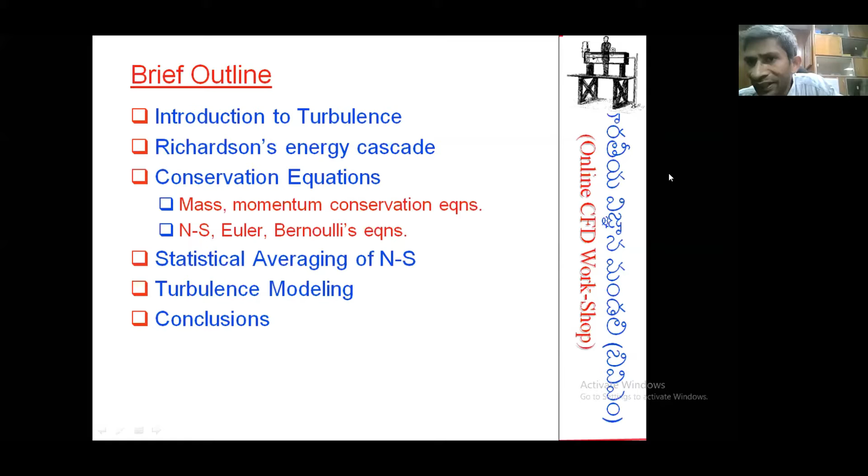Turbulence aids that. If you're thinking of flying machines in air or submarines in water, you need to understand aerodynamics and hydrodynamics. Turbulence completely controls both, depending on the situation. Think in terms of drag reduction of vehicles, for example Formula 1 race cars. You don't just want to reduce drag alone, but also make sure lift-to-drag ratios are within favorable limits.

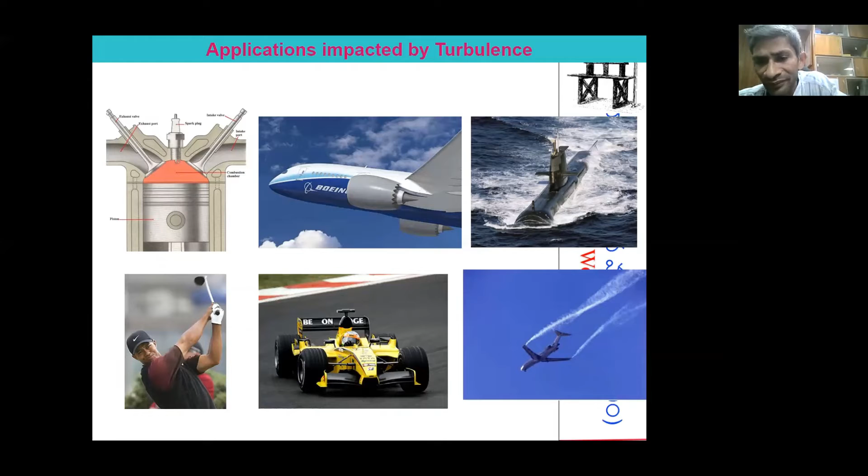Some common characteristics of turbulence that most of you are familiar with: turbulence is random, chaotic. These are essentially features of turbulence. Small scale random vorticity is generated, and it's a phenomenon of high Reynolds numbers. It highly dissipates energy, it's a continuum phenomenon, and of course it's three-dimensional.

One of the most important things to look at is: how do I define turbulence? This will be one of the serious questions. If somebody asks how to define turbulence, it's extremely important that we appreciate how turbulence can be defined. Maybe some participants can respond with how they think turbulence can be defined.

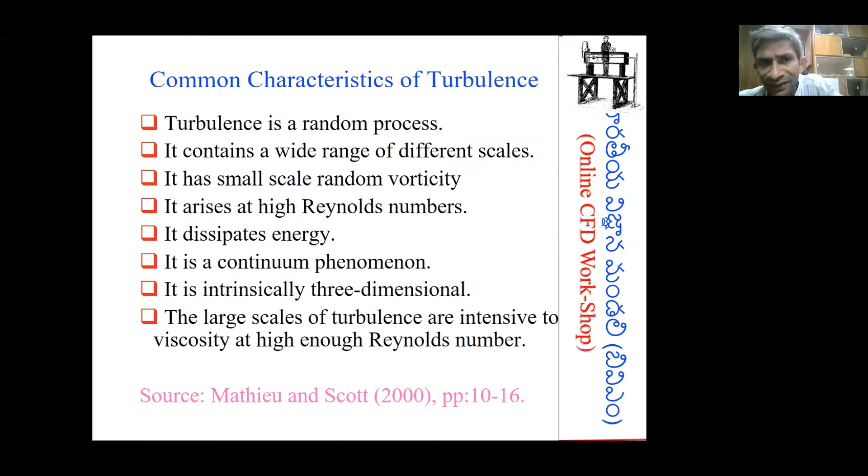One of the earliest experiments, of course, I grew up using Reynolds pens. I'm sure nowadays kids use different types of pens, and Reynolds was the early pioneer. His grandsons and others have made quite a bit of money from the success of Reynolds pens. Osborne Reynolds - there are many Reynoldses, his entire family tree is well known. The Reynolds dye experiment is quite popular.

One of those early experiments was to release a dye and study the flow of fluid and the corresponding dye released along the center line. You can see a tube here, with a bell mouth entrance so the fluid is accelerated but at the same time quietened through the process of acceleration, with no opportunity for disturbances to develop further.

A needle-like colored fluid is released along with that - how is the colored fluid being released within the tube? Is it being layered? For example, if the flow velocity is very small, the flow will have a straight line, meaning layer by layer kind of flow. This layer by layer type of flow is what is called laminar flow. Up to some point, it's able to suppress disturbances, but after some time, it's not able to suppress disturbances if the velocity is a little high.

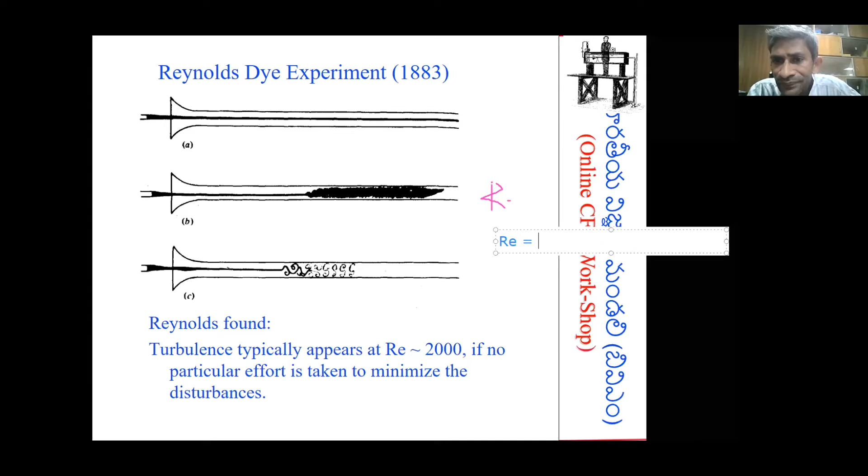When you have flow through a pipe, the Reynolds number corresponding to this situation is typically defined something like this: Reynolds number, RE, is essentially rho, the density, and some length scale, in this case diameter, divided by the dynamic viscosity. D, of course, is a length scale, and rho, as you know, is the density of the fluid.

Kinematic viscosity can also be thought of as dynamic viscosity divided by... I'm sorry, there is something missing, there is velocity. Sorry, there is a mu here, completely missed that. Velocity is incorrect, I'm sorry, it is dynamic viscosity. Nu is kinematic viscosity, nu is essentially mu by rho. So you can write it as rho Vd by mu, or you can also write it as Vd by nu.

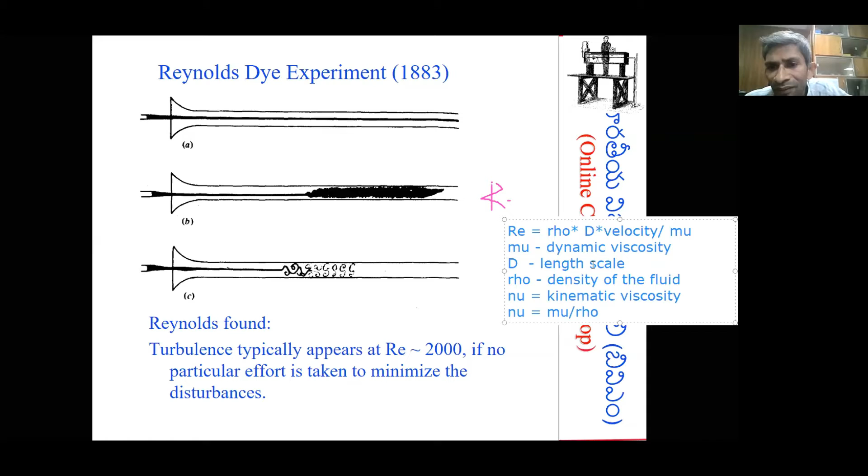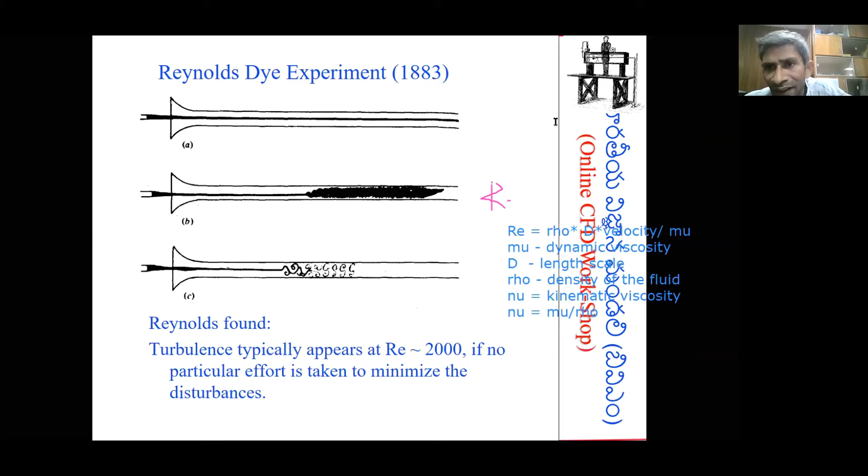Rho Vd by mu is the standard version that most of you would have come across, and Reynolds number somehow came to be one of the characterizing numbers, a non-dimensional grouping that characterizes the flow as either laminar or turbulent.

One can see there is a no-slip boundary condition associated with the surface. Surface velocity will be 0, because the fluid in contact with a solid boundary which is not moving will have the velocity of that boundary. So you can notice there is exchange of momentum across different layers of this fluid.

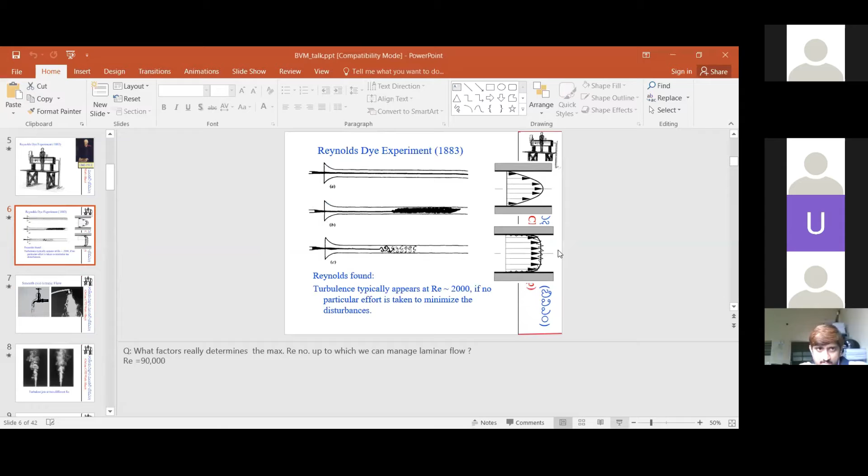In the context of turbulent flow, you have a chunk of fluid jumping from this layer to that, and back and forth. So if you look at the velocity profile across this cross-section, you will see an almost flat velocity profile. Very close to the wall, you have a much steeper gradient, responsible for what is called the wall shear stress, which would shoot up dramatically in the context of turbulent flows.

You can see that on the surface of the wall, you have a 0 velocity, or a no-slip boundary condition. A little away from the wall, you can see that the velocity is very high.

As you go towards the center line, the velocity drastically increases very close to the wall, unlike laminar flow. In laminar flow, you have a certain velocity jump and the velocity gradient is not steep. Whereas here, if you zoom into the region very close to the wall, you have a very steep gradient. Even that steep gradient will have a certain haphazard nature if you look at one velocity signal, if somebody is using a velocity probe and measuring at different stations all along this line.

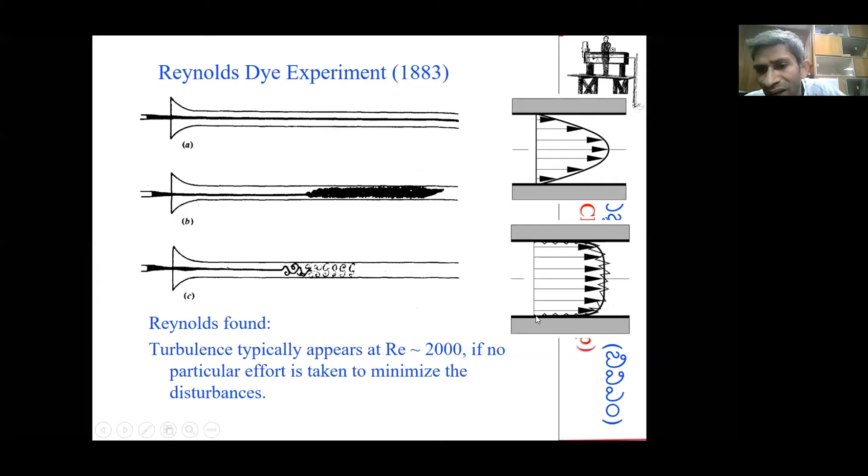Yeah, anything? Hello, any questions in between? Can we go forward? Okay, yes sir, yes sir.

We can see that there is certain randomness, and if you have several such random measurements, for example, I have another velocity profile, not very nice, but another velocity profile if I measure it will be like this, and so on. If you average all the velocity profiles, you get a very clear flattish velocity profile, and you can notice that this profile is going to be almost flat in the middle, almost 90% of this cross section. Only very close to the walls, very close to this surface, you will have a very steep gradient.

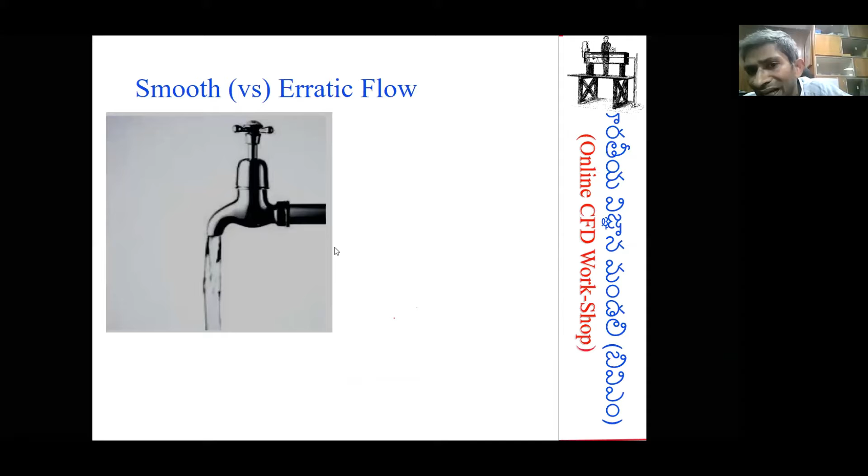Let us move on beyond this. So the key concern is you have smooth flow, layered flow, called laminar flow. You have highly erratic, random, haphazard flow called turbulent flow. This is what you see in the context of a jet coming out of a faucet. Whereas if you go to a tube of circular cross-section, and if the flow inside is laminar versus turbulent, this is the nature of the velocity profile. A paraboloidal profile is what you will see in laminar flow, whereas in turbulent flow you will see something like this. It's extremely important to understand this for very serious reasons.

Because the nature of engineering designs would drastically be different if the flow is laminar or turbulent. If the flow is laminar, you have the pressure drop corresponding to the frictional resistance, and those frictional resistances will be drastically different if it is laminar flow versus turbulent flow. Some of you may be familiar with something called Hagen-Poiseuille flow.

One can quickly say, okay, you have a velocity signal, and that signal can be thought of in terms of measuring it over time. On the x-axis, the abscissa, I have time, and on the y-axis I have the corresponding velocity signal. How is this velocity signal varying? Will it vary like this if I keep on measuring? Or if I measure once more, will it vary like this?

Think of this kind of variation as temperature variations within the same day. Of course, the day's temperature will not be like this, it may simply go up to noon and come down. Another day, if it is highly turbulent locally, it may be something like this. Another day could be very different. But if you look at the statistical average of all these different day temperatures in the month of May, they will give you, in a statistical average sense, a nice, predictable profile.

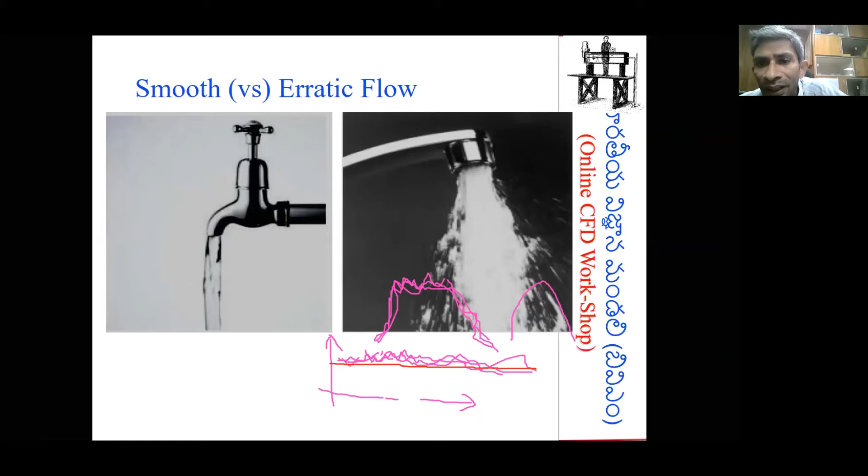Any guesses from the audience? Yeah, it's discussion time.

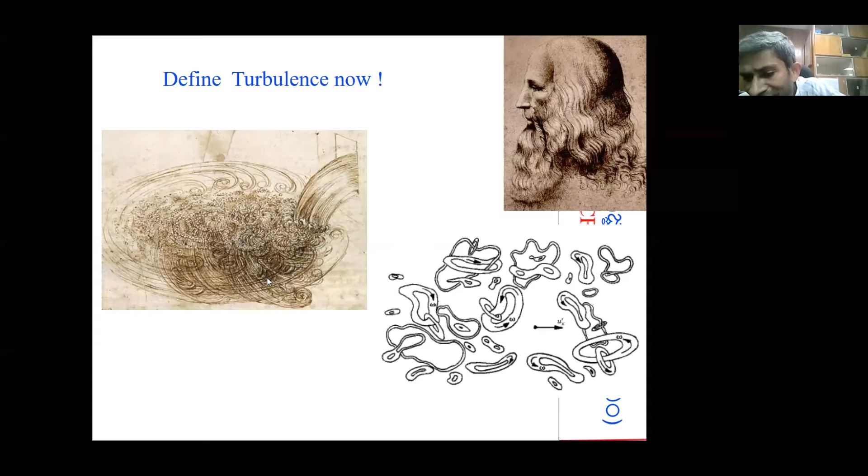This is where high Reynolds number versus moderate Reynolds number comes in. One of the serious things we're interested in is if you have large scale eddies and small scale eddies present in the system. Large scale eddies are called integral scale eddies. Small scale eddies are called Kolmogorov scale eddies or dissipative scale eddies. At the level of dissipative scale eddies, the entire energy is dissipated.

For example, think of a family. The family gets a salary, and that salary is dissipated by different sources. So the source of energy is the large scale eddies, while dissipation or loss of energy is done by small scale eddies. The relation between the size of the large scale eddy and the small scale eddy decides the nature and kind of turbulence present.

For example, if the Reynolds number is very high, the smallest possible eddies in the system become still smaller, as shown pictorially here. Whereas in the context of medium Reynolds number, wherein the flow is still turbulent, the size of the smallest eddy is bigger than that at a much higher Reynolds number. There are two scales essentially.

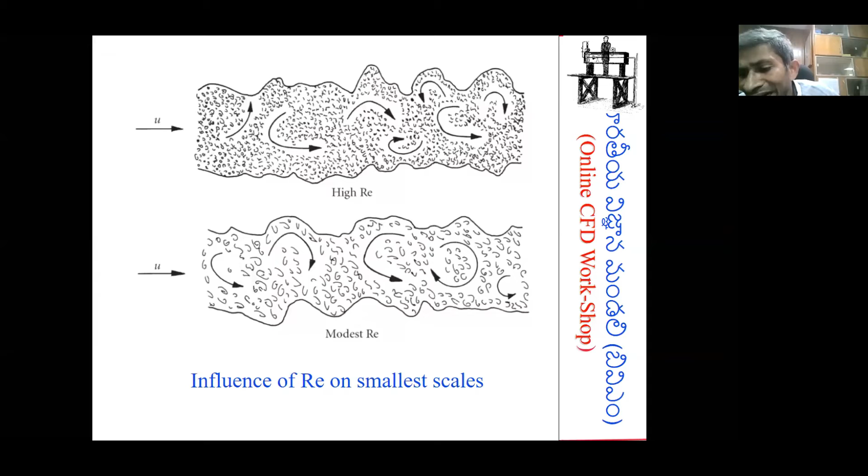You think in terms of the integral scale, and you also think in terms of the Kolmogorov scale. The Kolmogorov scale is what decides if the Reynolds number is very high or higher. So higher Reynolds numbers are guaranteed to have much finer length scales. Therefore, if you recollect this particular picture...

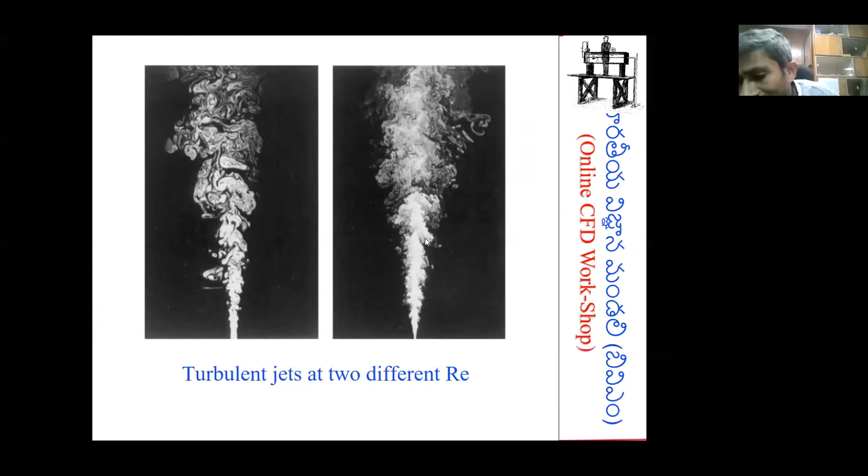This is also high Reynolds number, this is also high Reynolds number, but this is higher Reynolds number, because the smallest possible eddy within the system is much finer. So the size of the integral scale eddy and the size of the Kolmogorov scale eddy, or dissipative scale eddy, decides how much finer the smallest possible eddy scale is compared to a Reynolds number that is slightly more moderate.

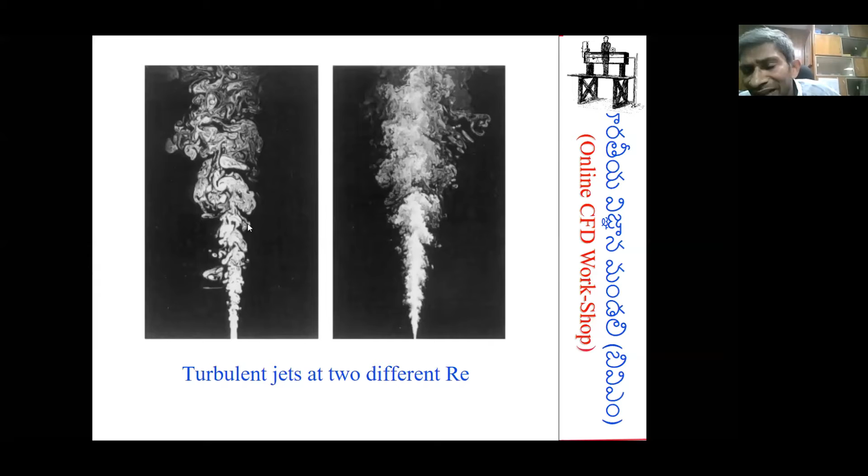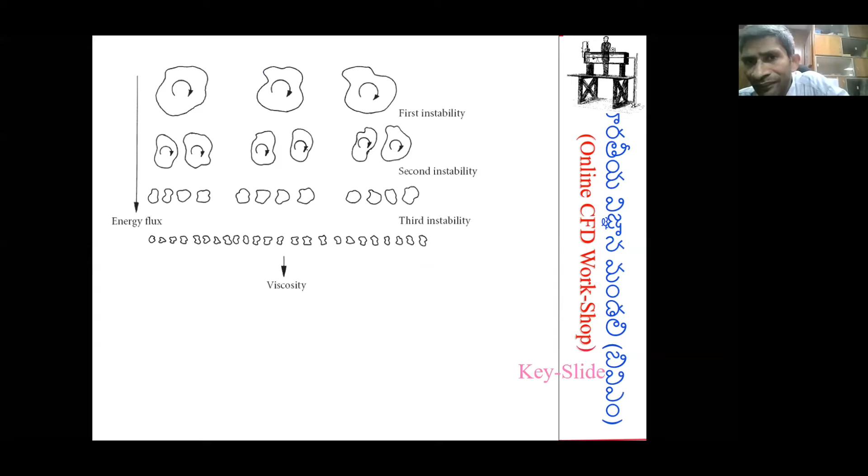So if you look at how to mathematically build that relation, that's what we are going to resort to with Richardson. Richardson gave this beautiful idea back in the 1920s. He said big eddies have little eddies and they feed on their velocity, and little eddies have lesser eddies. A whirl is essentially an eddy, and so on down to viscosity.

When you say viscosity, this is called dissipation, where the entire energy is completely lost. The large scale eddies, or integral scale eddies, can be thought of as generated by the nature of the Reynolds number, and that eddy undergoes a series of continuous instabilities. In the process of passing this energy of the large scale eddy to medium scale eddies, there is no loss of energy. From a medium scale, there is still no loss of energy, and they become smaller and smaller. The idea is that there is a tangle of interacting vortex tubes.

This is only a hypothesis, but it has been tested beautifully, and the relations between the size of the integral scale eddy and the Kolmogorov scale eddy have been very carefully deduced. Using this hypothesis, the idea is that you have large scale eddies in the system called integral scale eddies, and the smallest possible eddy scales in the system called dissipative scale eddies. At the level of the dissipative scale eddies, the entire energy...

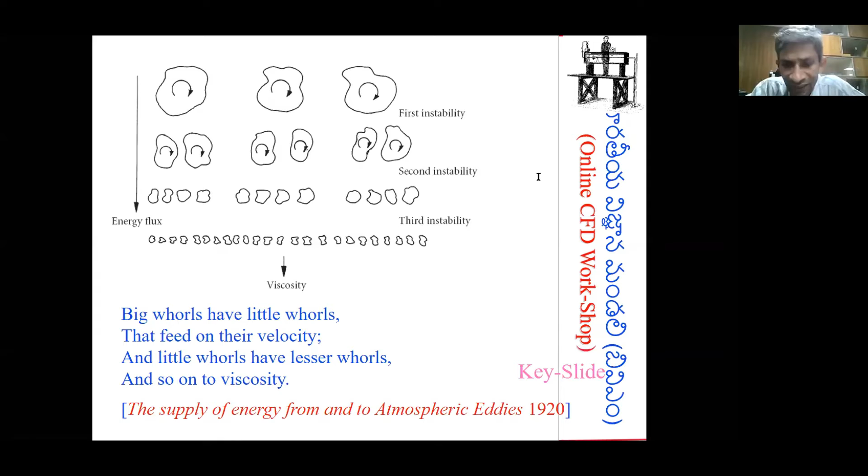Let me write this down so there is clarity on what we are talking about. So you have large scale eddies in the system, called integral scale.

You have small scale eddies in the system called dissipative scale eddies. This is also called Kolmogorov scale eddies, after Kolmogorov, the Russian mathematician, who deduced one of the most beautiful relations in terms of wave number and the corresponding spectrum.

So let us call the integral scale eddies as L, small l, and the dissipative scale eddies as eta. Eta, just to give a feeling...

What is the relation between L and eta? The idea is that the relation between L and eta, we are going to prove in a very short time. L is equal to Re to the power... eta equal to length L times Reynolds number to the power minus 3 by 4. So this is what we are going to prove very soon. Eta, the smallest possible eddy present in the system, is equal to the largest possible eddy in the system multiplied by Reynolds number to the power minus 3 by 4. Using very simple-minded arguments, we are going to prove this.

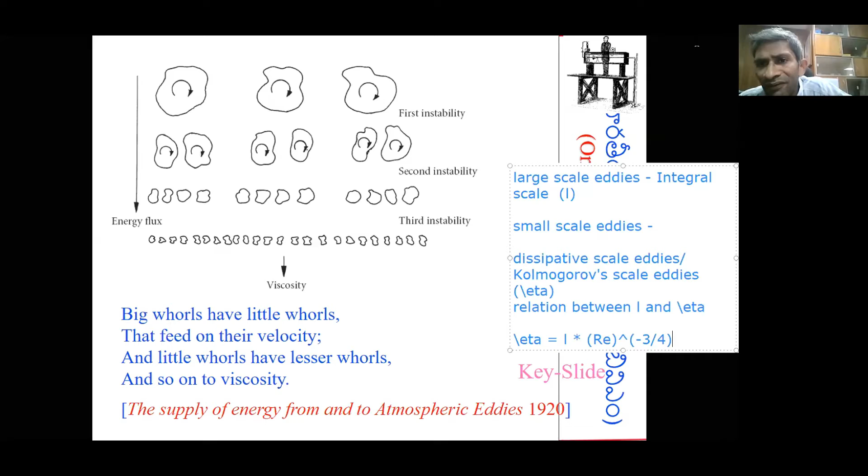And you will be surprised. Similarly, we can also prove the velocity of these smallest eddies and its relation to the velocity of the largest eddies and so on. The idea here is that we think in terms of the instabilities which are present. It goes purely by the stanza which was published in Journal of Atmospheric Science back in the 1920s, and this hypothesis essentially builds this kind of relation: eta is equal to L multiplied by Re to the power minus 3 by 4.

And then dissipation or energy loss happens at the level of the Kolmogorov scale eddies. Of course, energy is extracted by the large scale eddies, and that energy is transferred without any loss of energy to the small scale eddies, from the small to smaller to still the smallest level.

Think of this example - I'm not sure whether it's excellent, but an ideal example. You have the central government, which has the funds. Without any loss of energy, they transfer funds to states. From the states, it goes to districts. From the districts to mandals. Mandals all the way to the panchayats. At the level of the household, it is transferred without any loss of energy from the top to bottom, and the actual dissipation or actual usage of that money given by the central government happens typically at the level of the lowest possible eddy scales.

This example may again be thought of as ideal, but that's how we want it. So without any loss of energy, there is a transfer of energy from the large scale eddies to medium, medium to small, small on until the level of Kolmogorov eddies. There is no loss - not having any loss of energy is essentially a kind of hypothesis, and that is very useful to build this relation: eta is L times Re to the power minus 3 by 4.

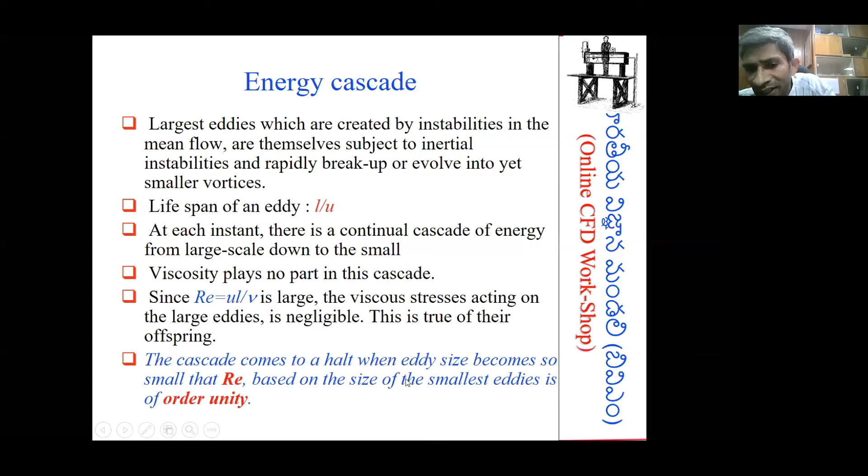Meaning, when the velocity of the smallest eddy in the system, and corresponding length scale, size of the eddy, divided by the kinematic viscosity of air or water, whatever you are talking about - that particular non-dimensional grouping, if it gives you a Reynolds number of order 1, order of unity, you are likely to see only loss of energy, dissipation of energy. Therefore, the size of the smallest eddies of the order of unity will do only dissipation, as pictorially presented in this particular slide.

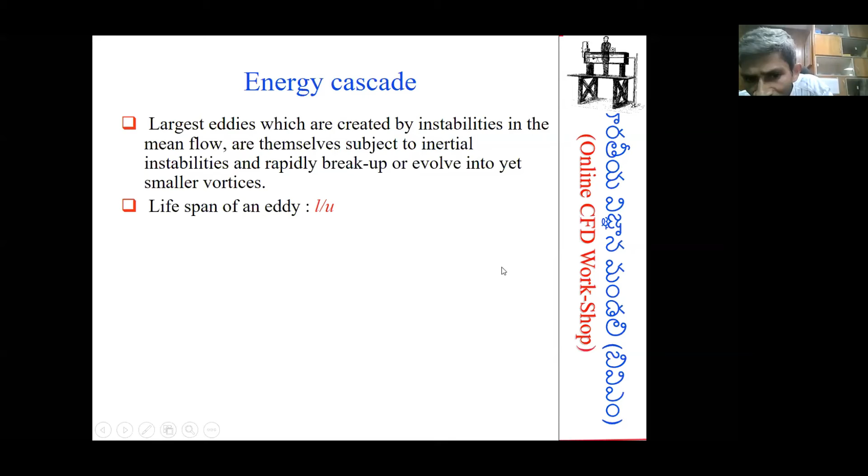So by going with this hypothesis of Richardson, we are able to quickly derive a relation. And what is the name, what is the size, what is the nature of that relation?

We just briefly mentioned, if U is the velocity of the large scale eddies, V is the velocity of the small scale eddies, and the corresponding length scale associated with the large eddies is L. The corresponding velocity length scale associated with the smallest eddy in the system is eta. We want a relation between L and eta, and we want a relation between U and V. That's exactly what is going to define how small is small, how fine is fine.

So when we said higher Reynolds numbers will have always finer scales of eddies, how do I mathematically build a relation between the integral scale and the dissipative scale? This is exactly what we are going to do.

So the energy cascade process, as we said, is going to be completely dissipation free. Let us say the rate at which energy per unit mass is being supplied from large scale eddies to small scale eddies - I can write this as energy per unit mass. Let me write that.

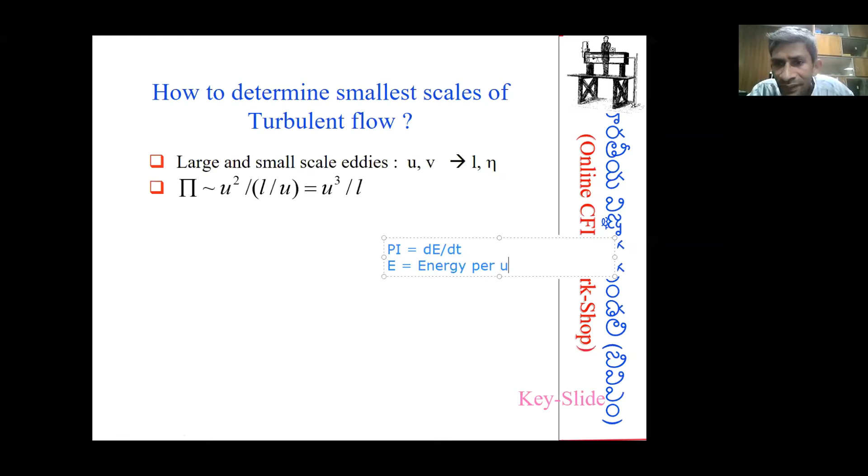This pi symbol is d by dt, d capital E by dt. E is energy per unit mass. Of course, T is time - it is simply time, I will not use the word time scale. We are using the scale associated with corresponding eddy sizes. So you want to say that pi is dE by dt.

If you look at it, E is energy per unit mass. You know that half mv square is essentially the energy associated with a mass of an object with a velocity v - that we are talking about kinetic energy. So if it is half mv square, we can think in terms of that energy per unit mass is half v square, and half v square, in this context, if an eddy can be thought of as a single concoction, you can think of its order as u square.

So d by dt, the numerator here is u square, divided by the denominator, change in time scale, which is called L by u. L by u is associated with the corresponding lifespan. Change in energy is d, the differential change in energy per unit mass, and dt, of course, is difference in time. So using this, one can quickly say, okay, L by u is the lifespan associated with the eddy.

U square divided by L by u, one can quickly say it's u cube by L. Please notice these are all orders - order meaning you think in terms of what is the size, is it in terms of millimeters, nanometers, or meters, kilometers, and so on. So if you think in terms of that, you do not care much about the magnitude. You only care about what exactly is - how small is small, kind of a situation.

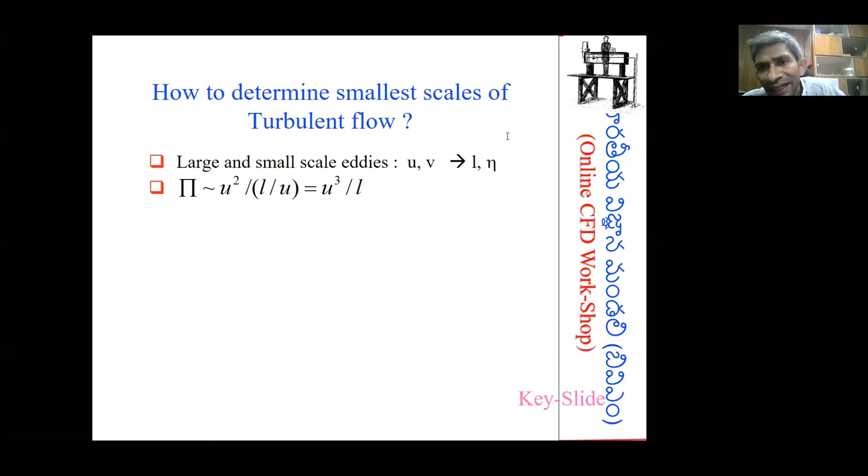So if it is of order u cube by L, this u cube by L is essentially transferred from the large scale eddies to medium, and medium to small, and small to smaller, and so on.

If you look at the nature of this discussion, statistically under steady conditions, this matches exactly with the dissipation of energy at the smallest scales. If that is the case, this u cube by L, which is transferred from largest eddies to large, large to medium, medium to small, small to smaller, and so on, must be equated to what is called the dissipation symbol, epsilon. Here epsilon is essentially trying to give you, it is slightly in tensor notation, don't care about this, but it is essentially a strain rate.

The kinematic viscosity multiplied by strain rate, 2 times, is going to give you dissipation. So the corresponding strain rate is essentially velocity divided by eta. The strain rate is velocity gradient essentially, meaning dv by dx. A typical dv by dx gives you an order of change in velocity divided by change in length scale. That change in velocity by change in length scale is, in a scale sense, presented as v by eta here. So replace nu multiplied by this, nu and v, don't get confused. This is kinematic viscosity, and this v is a velocity scale associated with the dissipative scale eddies, or the velocity scale associated with the smallest eddy in the system, at length scale eta.

So replace S suffix ij, which is the strain rate here, with v by eta. If you do that, you essentially have epsilon is of the order kinematic viscosity multiplied by v by eta times v by eta. You essentially have nu v square by eta square.

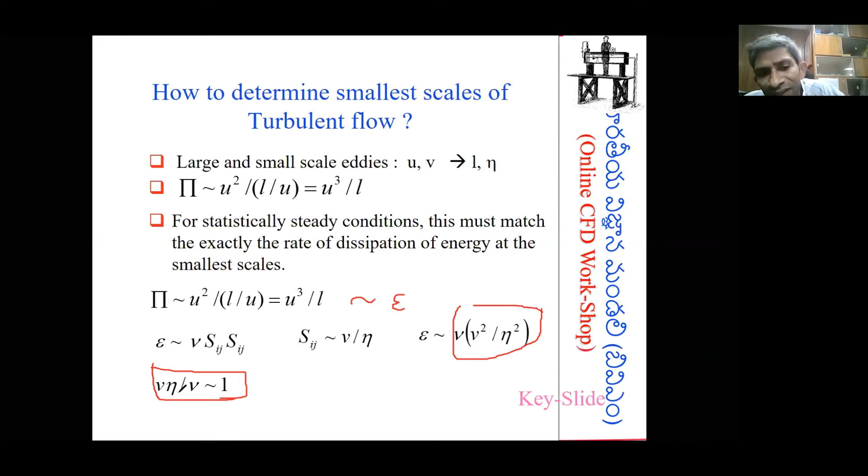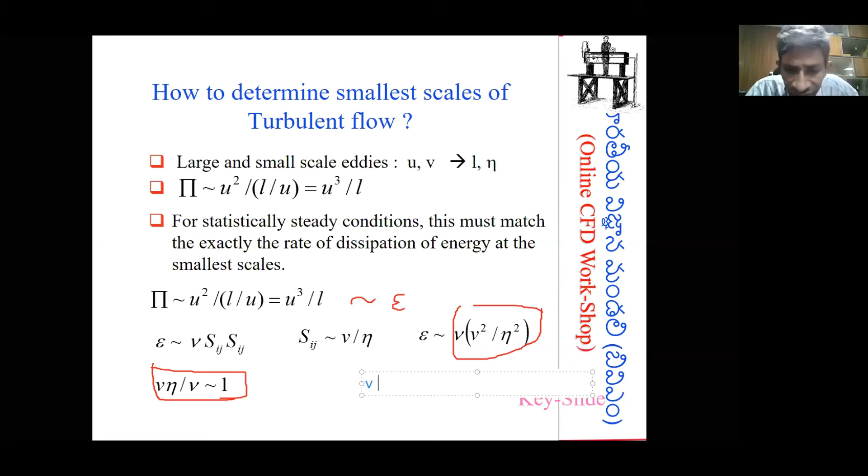Quickly, from v eta by nu being of order 1, you can write that eta must be of the order of nu by v. So one can quickly say that v, the velocity of the smallest eddy in the system, should be of the order of nu divided by eta.

So if that is the case, wherever you see v square, you can replace it with nu square by eta square. If you do that and rearrange this entire discussion, you end up getting a relation between the smallest eddy size eta and the largest eddy size in the system L, and the Reynolds number. Reynolds number is defined as usual; I leave it as an exercise for you to deduce that relation.

Purely using this particular version, which is equated to u cube by L, these 2 are equated. Wherever you find v, you replace it: you are finding v square here, and the corresponding v square will be nu square by eta square.

So if it is nu square by eta square, it becomes nu cube by eta power 4. Nu cube by eta power 4 is equated to u cube by L. If you do that and do a quick rearrangement, please notice nu cube by eta to the power 4 is of the order epsilon, which is of order u cube by L.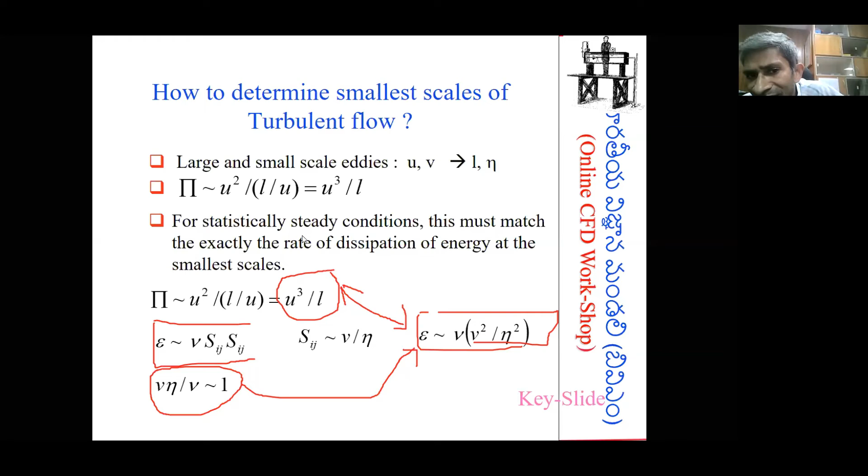If you equate these two, you can quickly build a relation, and that gives you a version like this. Eta, the smallest eddy size within the system, is equal to L times Reynolds number to the power minus 3 by 4. Similarly, the velocity of the smallest eddy size, the dissipative Kolmogorov scale eddy, is equal to the velocity of the largest eddy size times Reynolds number to the power minus 1 by 4. Ignore the ones on the right hand side. That can also be proved quickly.

But the key point I want you to notice is the following. You have relations wherein the largest eddy size in the system, the integral scale eddy, is called L, and the corresponding velocity of those eddies is U. Similarly, you have the smallest possible eddy size in the system called eta, and their corresponding velocity is small v. So the corresponding relation is something like this.

Here, please notice the Reynolds number in this case is defined as U times L divided by nu, based on the largest eddy in the system. So notice, if the Reynolds number is very high, the corresponding eta is going to be very low, because it's Re to the power minus 3 by 4. Think of Re as 10 power 5 versus 10 power 6 — 10 power 6 will have a much smaller value of eta compared to Reynolds number of 10 power 5. So if you have a higher Reynolds number, the smallest length scales possible are going to be even smaller.

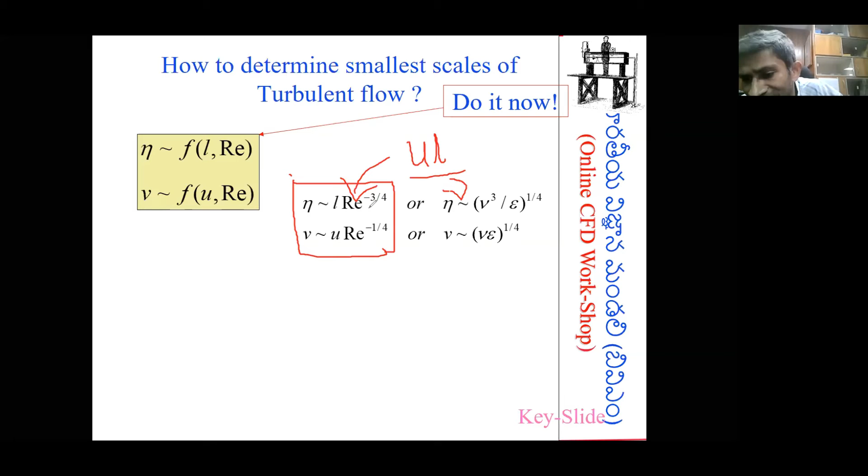That's the key deduction from this, and this has been measured very systematically. For example, if Reynolds number is 1000, based on the large scale eddies — say you have a chimney releasing pollutants, and the size of the chimney is 1 centimeter — one can quickly say the corresponding smallest eddy size present within the system will be 0.06 mm, because you are essentially talking about 10 cube to the power minus 3 by 4 multiplied by 1 centimeter, which gives approximately 0.06 millimeters.

So eta and V are simply called the Kolmogorov microscale. L and U are simply the corresponding integral length scale and integral velocity scale.

Let us now take up some questions and see the next slide also, and then take up some questions. That would be even more meaningful.

So this is some feel for numbers. If you have a 100-meter tall chimney with a diameter of about 1/3 of a meter, and it is 100 meters tall — typical velocity of the large-scale eddies, let us say if there is a wind blowing past it at 2 meters per second — the corresponding Reynolds number is about 1/2 lakh, because it's air, and one can use velocity as this and diameter d as the length scale, divided by nu, the kinematic viscosity of air.

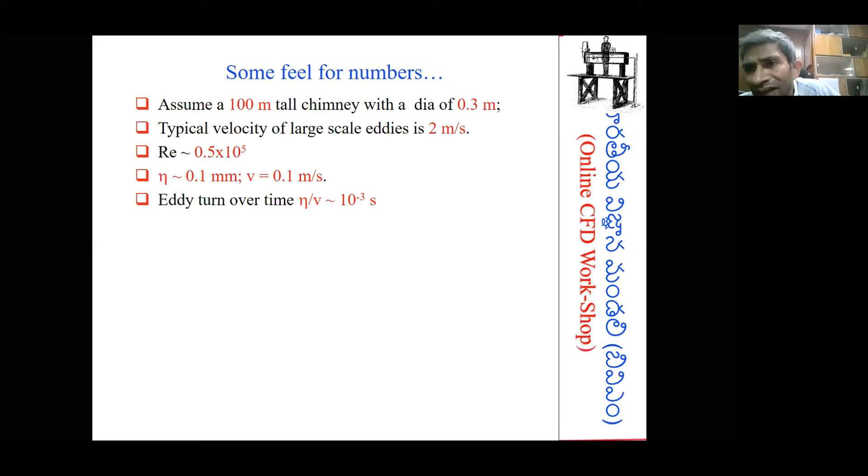The smallest possible eddy in that system will be only 1/1000th of a second. Please see this very carefully. This lifespan of an eddy is also called eddy turnover time. So the eddy turnover time will decide, at any instant, how many eddies you have in the system, what is the nature of the relation, and so on.

And so much of dissipation of energy surrounding a 100-meter tall chimney occurs in turbulent structures which are only 1 mm or so in size. And of course, if we are simulating all this, we should be careful in terms of resolving those eddies.

See, we are talking about computational fluid dynamics. We are talking about how to computationally simulate the whole process, what is the nature of design that's associated, and so on. So if we are looking at doing a full-scale simulation, we must be able to resolve the velocity and length scale of the dissipative scale eddies. Such methods are simply called direct numerical simulations, DNS.

So if that is the case, you must account for 10 power minus 3 seconds all the way to, let's say, somebody is looking at a 100-second simulation or a 2-minute, 120-second simulation. Then we must account for length scales all the way from 0.1 mm, meaning your grid size associated with your CFD calculation has to be that small. So what actually decides a grid size is the Kolmogorov scale eddies.

Are you trying to resolve those eddies and so on? If that is the case, you must have a grid size as small as the Kolmogorov eddy size. Otherwise, for example, if somebody is thinking of catching fish, okay, the smallest fish that the person can catch is limited by the size of the net. If the size of the net is too small, he will catch very, very small fish also, big ones also, and so on.

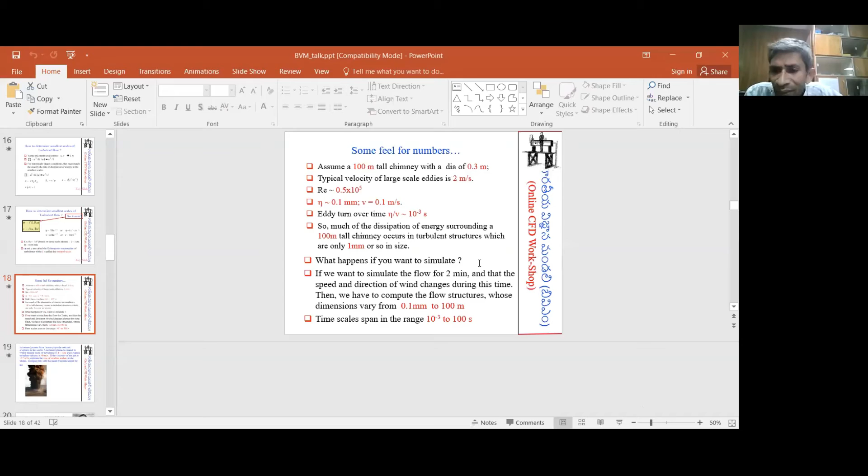To address that specific question, I don't know what that Planck and Kerr means. Here we are talking about loss of energy at the level expounded by Richardson, Lewis Richardson. His theory gives an overall feeling between the integral scale eddies. It is highly hypothetical, but one can deduce a simple-minded mathematical relation between integral scale eddies and the dissipative scale eddies, in terms of length scales, time scales, and velocity scales.

All right, any other questions? Somebody was trying to ask something. There is one more question, sir: does these scales have any range of measurements?

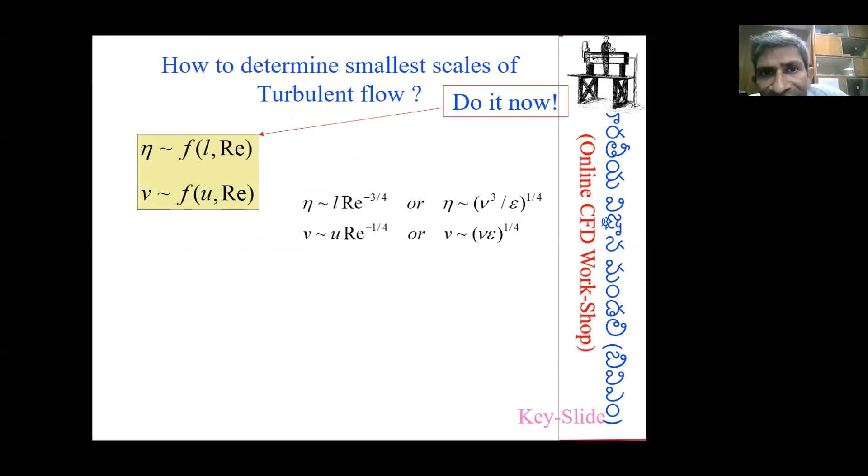That's what we were talking about. All the measurements are associated with this entire feel for numbers. This entire feel for numbers is all about that. So these are all about feel for numbers.

So with extremely simple-minded arguments, such as the energy cascade, there is no loss of energy from integral scale to medium sizes and small up to the level of smallest possibilities. When we say smallest possibilities, both in terms of length scales and velocity scales, length and velocity together will give you the lifespan of those eddies - how long will they survive?

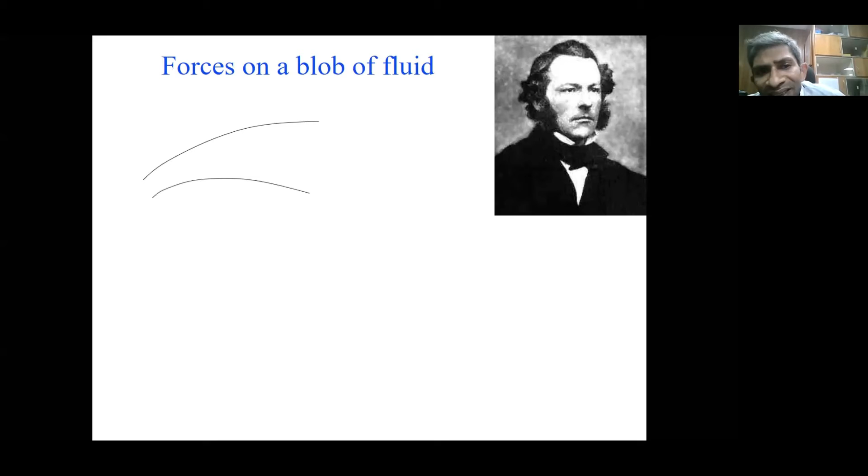But let us move beyond that. You have the Navier-Stokes equations, and we are interested in looking at forces on a blob of fluid and how it is responsible - one can quickly derive Navier-Stokes from Newton's second law of motion. Once we derive Navier-Stokes we'll see what's going to happen. There are several ways to derive Navier-Stokes, but the simplest possible way one can think of is to assume a fluid particle which is spherical.

The size of this particle is, let rho be the density of this particle, and v is the velocity of this particle going along a certain streamline. One can quickly show that the mass times acceleration of this particle is due to the forces it experiences as it moves.

In the context of a Lagrangian approach, if del V is the volume of this blob of fluid, multiplied by density rho, dV becomes the mass. Then v is velocity, and you need to look at acceleration, how it is accelerating within the system, and it of course experiences pressure forces, which are surface forces.

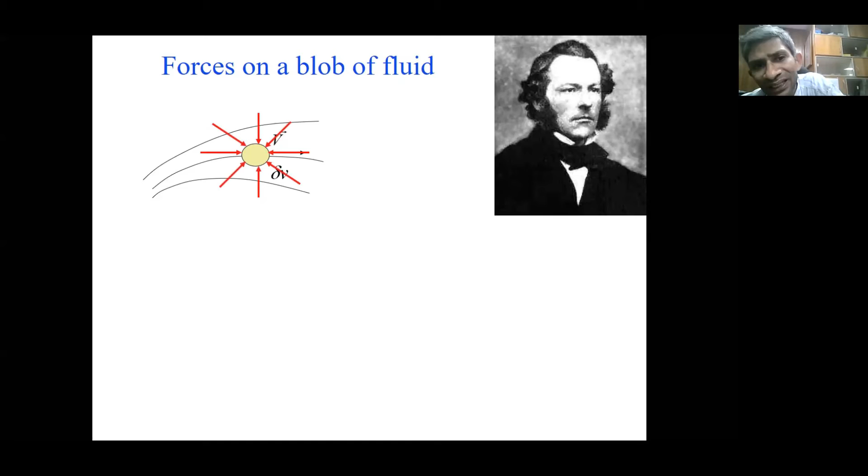One can think of pressure force as always negative, and therefore inward. Assume there is a surface pressure force acting on this, and all the fluid particles surrounding it are bombarding the surface, creating a certain pressure. You integrate that pressure and simply say mass times acceleration can be written as net pressure force plus the viscous forces.

So sum of all the forces on the right hand side, mass times acceleration on the left hand side, plus the body force. Body force, if the particle is suspended in the fluid in a gravitational field or any field, for example electric field, magnetic field, gravitational field, whatnot, all kinds of volume based forces or body forces.

These are all surface based forces relative to a certain surface, and therefore you have surface forces plus volume based forces, body forces. Corresponding to this blob of fluid, one can write down something like this: rho dV is the mass, DV by Dt is your material acceleration, or the acceleration associated with change in velocity.

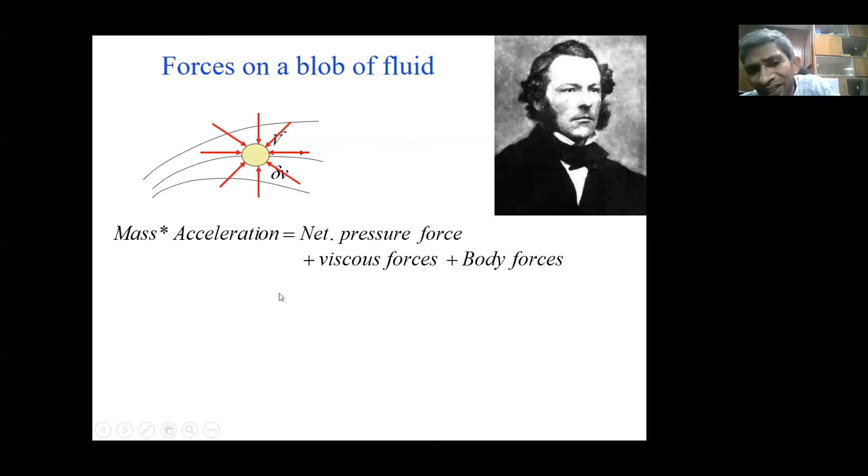Capital D is specifically mentioned to make sure you understand there is a material acceleration associated with this, the change in velocity divided by time. So you have mass times acceleration, which is equated to the net pressure force. Pressure distribution on the surface is always inward and compressive, and therefore minus P is what we are talking about.

You integrate the surface pressure all over the surface of this spherical blob of fluid, and you end up getting the net pressure force, plus the viscous forces. Of course, viscous forces are dependent on the wall shear stress gradients, and then body forces, because it's suspended in gravity. Mass times gravity is what is mentioned here: mass is rho, and dV is the volume of the spherical blob of fluid. So rho dV times g is plus the viscous forces.

So if that is the case, one can quickly show that this is how it is, and then one can transfer using the divergence theorem. One can write surface forces, a surface integral, translated into a volume integral, and the integral minus P dS is now replaced with a gradient of pressure times del V. We can cancel del V on both sides.

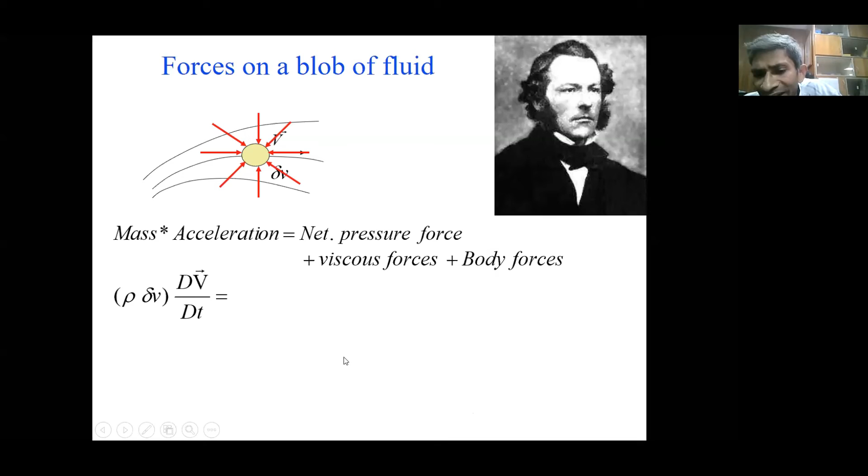Or also write viscous forces in terms of the shear stress gradient, something like this: gradient of shear stress, del tau ji by del xj, plus rho g. This del V is common everywhere, and the gradient of this multiplied by del V is nothing but the viscous forces. One can cancel del V on both sides, and build a relation like this. This is how Navier-Stokes pops up.

Is this Navier-Stokes equation sufficient for our understanding of fluids is a key question that one has to address and answer, and then if that is the case...

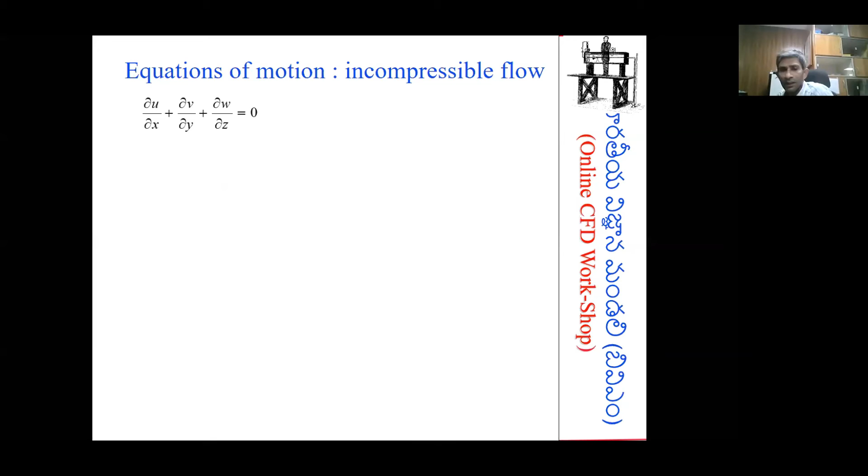So if that is the case, the corresponding mass conservation equation and momentum conservation equations can be written something like this, the equivalent of what we wrote just now. But here, please notice, in the context of Navier-Stokes, we start with mass times acceleration is the sum of all the forces, and then we go beyond this and look at shear stress, the gradient of shear stress.

But this shear stress needs to be written in terms of the corresponding strain rates. That relation requires Newton's law of viscosity. So essentially, Navier-Stokes requires three principles: F equal to ma, and you also require the corresponding Newton's law of viscosity.

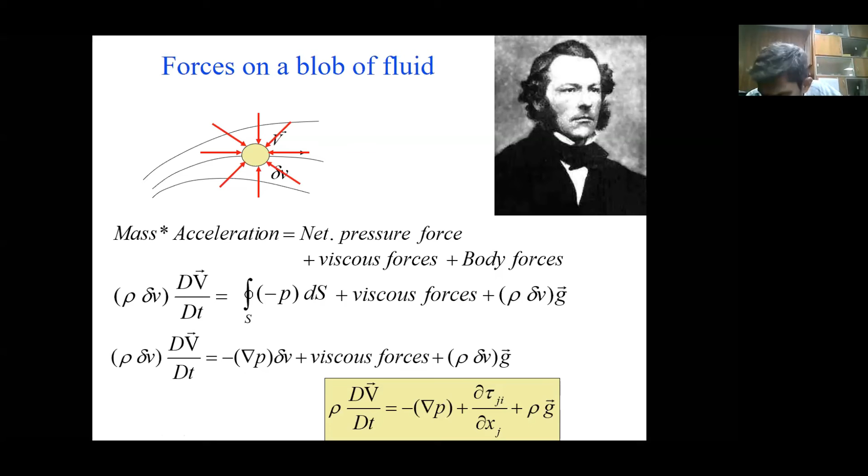You also need to plug in the mass conservation. So the sum of mass conservation, F equal to ma or Newton's second law of motion, and Newton's law of viscosity, three laws put together, is your Navier-Stokes. That version of Navier-Stokes is presented here at the bottom. You essentially have the vector form, and the one on top is the corresponding components, where U, V, W are the three velocity components in the X, Y, Z directions.

You think in terms of solving this, and beautifully the system can be solved. But unfortunately, for Navier-Stokes, I'm not sure how many of you are familiar, there are no closed form solutions. When we say closed form solutions, we are talking about analytical solutions. Can somebody solve this mathematically if boundary conditions are given? The answer to this is yes and no. Why yes and why no? Because many people have left.

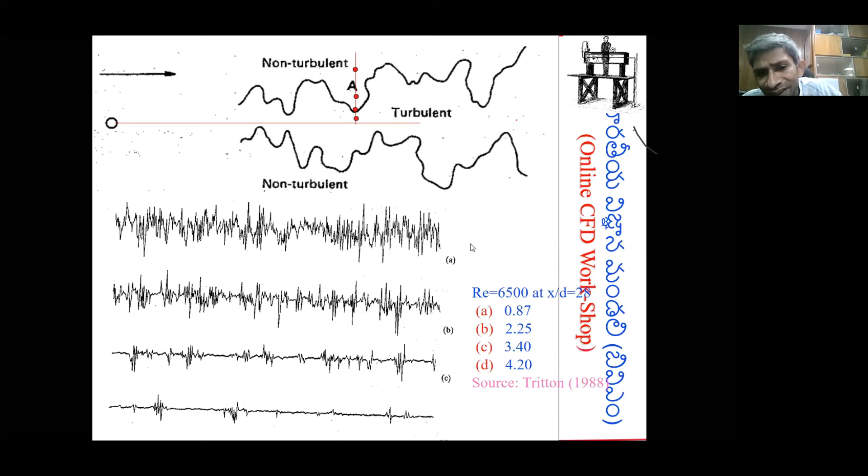So it's extremely important to see what we are trying to simulate, and also to appreciate how we predict turbulence. One way to proceed for this requires introduction of tensors, which I think I'll skip. I'm not sure how many are familiar with tensors.

If somebody is familiar with tensors, the rest of the slides would look meaningful. Otherwise, they will start shouting at me saying let us take up some questions. I think taking up questions will be more meaningful at this point.

Hello? I think Nagaraj must be having some question. Praveen, do you have any question? Hello. I'm still not sure whether people are able to listen or they just switched on and left the place.

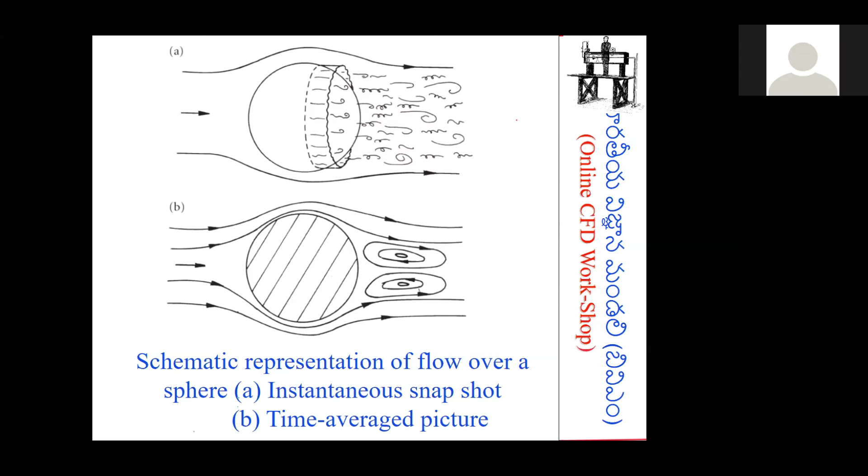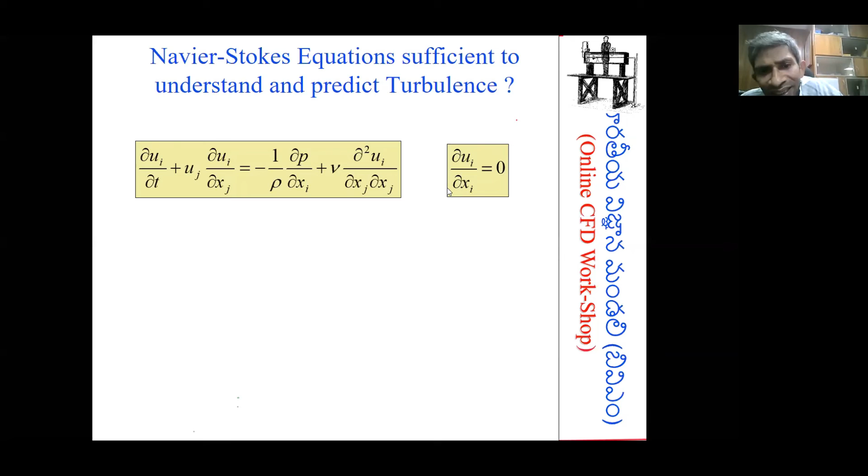Whereas in the case of a dummy index, you essentially mean an implied summation. For example, i is a dummy index, it's repeating, meaning there's only one single equation because i is repeated. There are 3 terms here in 3 dimensions: del u1 by del x1 plus del u2 by del x2 plus del u3 by del x3, equal to 0. If you replace u1, u2, u3 with u, v, w and x1, x2, x3 with x, y, z, then this is mass conservation: del u by del x plus del v by del y plus del w by del z equal to 0. That is your mass conservation. We can expand this and look at the details, but I'll skip this.

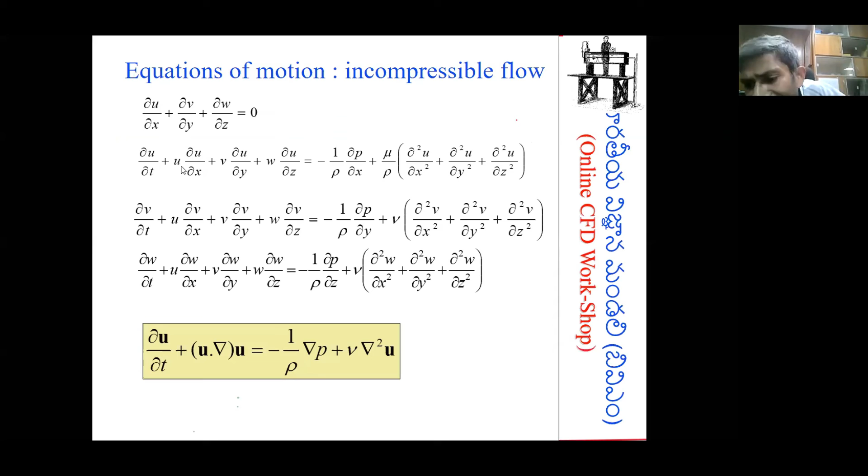One of the most important things with Navier-Stokes is that it's quadratic in U. Let us go back to this: here, U times del U by del X is a nonlinear term. U is the velocity which is getting modified, and it's also responsible for those modifications. So a gradient of velocity getting multiplied with velocity itself is a source of nonlinearity. You can also write this as del by del x of u square by 2. If you do that, you notice u square is a quadratic, so you're encountering a nonlinear term, whereas other terms are linear terms. All 3 terms here are linear. But the moment an unknown gets multiplied with an unknown, it's essentially a nonlinear term.

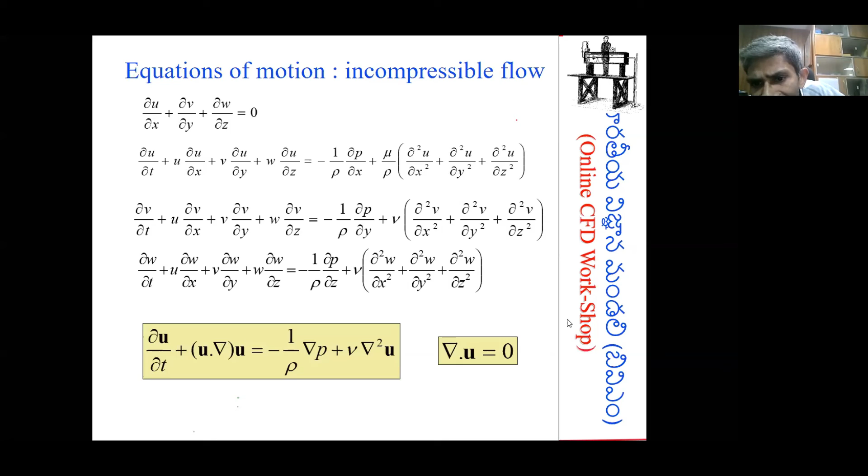With reference to Navier-Stokes, you have a quadratic term in U, and there's a complex and rich phenomenon responsible for this. Those convective terms are responsible for turbulence, and there is a mathematical difficulty in solving in the context of closed form solutions.

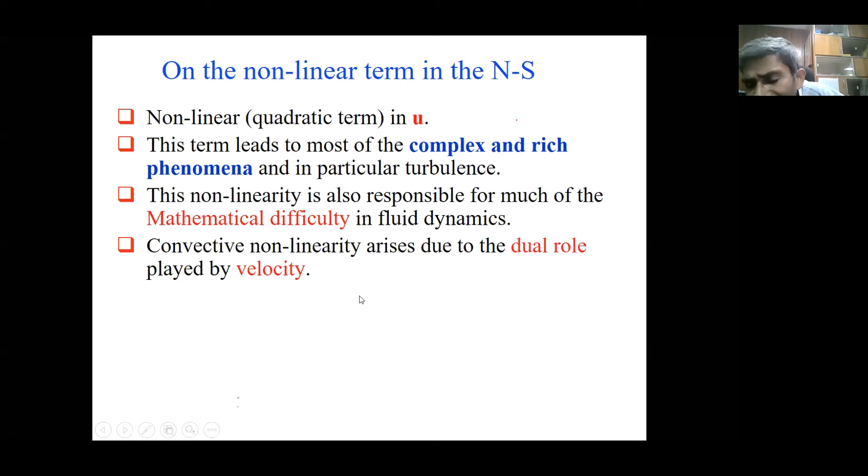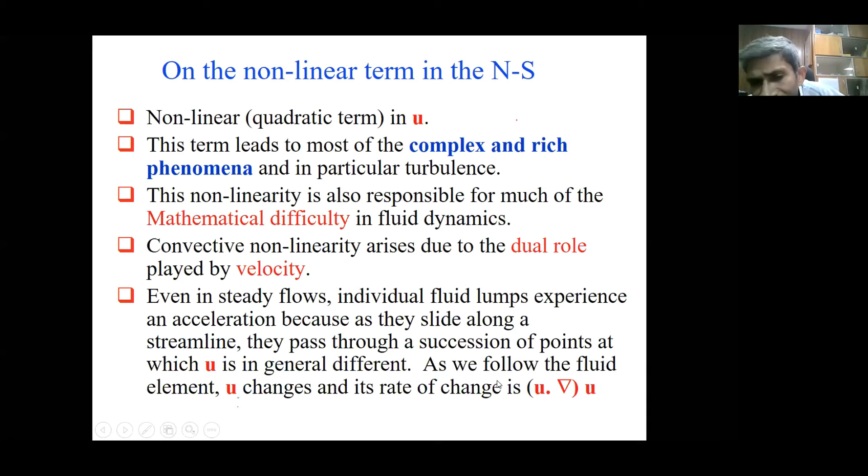Unfortunately, the velocity plays a dual role: it is also the term which is getting modified, and also the term which is responsible for those changes. In some sense, U dotted with del operating on U is the convective term, which is responsible for very serious changes due to turbulence, or influencing turbulence.

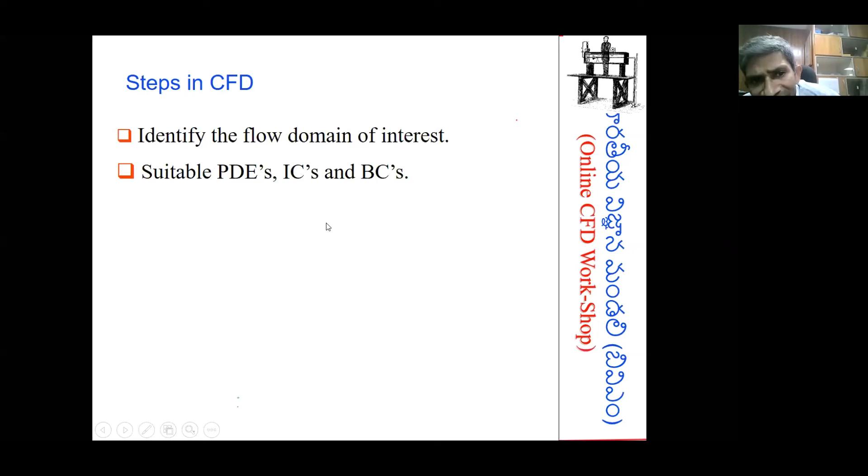That is also critical, and we need to tessellate or discretize the domain - that is the next step. We need to develop a system of equations, essentially translating the whole discussion into an Ax equal to B kind of situation, and solve the system of equations. Once you solve it, you essentially have the vector of unknowns. In a CFD problem, this can translate into a billion by billion matrix - n by n size as big as a billion.

For extremely good quality computations related to engineering designs, introducing a size of billion by billion is very common. So the vector of unknowns is the x vector, and Ax equal to B is the standard format in which the system of equations is generated.

Post-processing is also critical. The vector of unknowns gives you certain features related to velocities and pressures, but the end goal may not be velocities and pressures - it could be performing your designs. How much heat is extracted from a surface? What should be the size of the inlet port - should it be bigger or smaller, and how do I design that? How should the design of the entry be?

You will look at a lot of detailed information, and based on your design goal, post-processing has to be performed. If the focus is on drag, you may focus on the viscous drag and pressure drag. The functionality of the whole discussion becomes very critical, and post-processing is that particular step. I think I'll skip this.

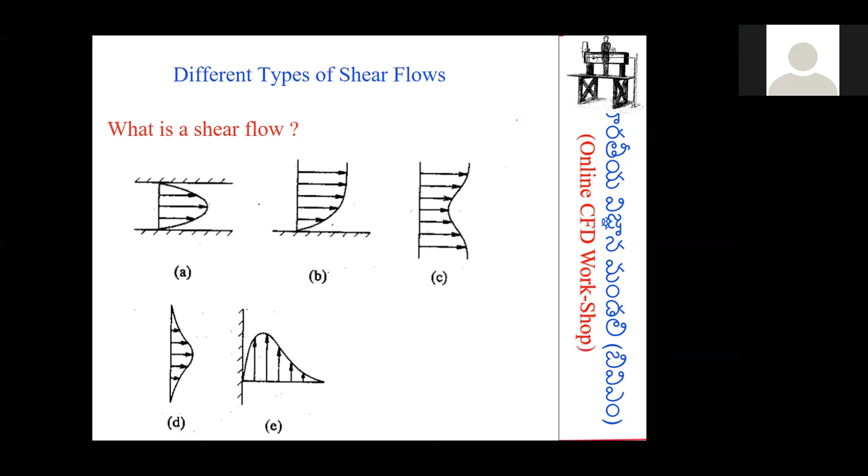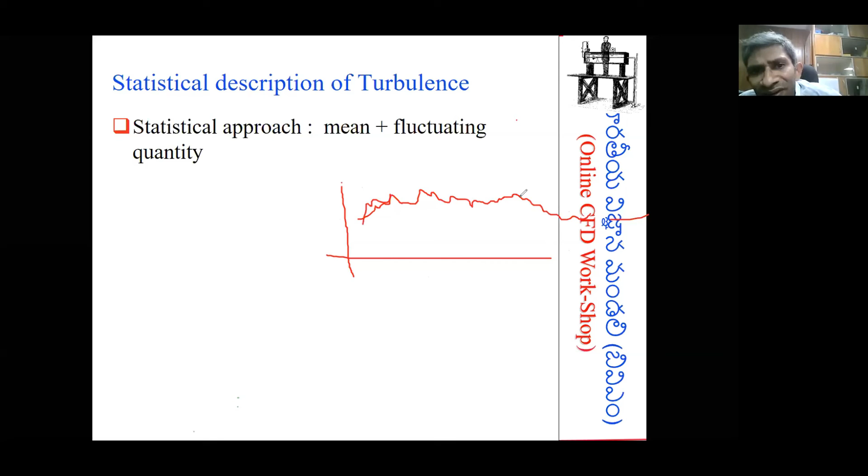That's exactly what turbulence modeling is trying to do. You essentially split this mean flow or statistical signal into two components: a mean flow plus a fluctuating component. The way to do that is the following - you think of this as your mean, and this mean with reference to fluctuation is what we are talking about. Let's try to do that for every velocity signal.

For every variable of your system, you are dividing it into a mean plus fluctuating component. So every variable u, v, w, and p are now sliced into two parts: one is the mean or average plus the fluctuating component - something fluctuating about the mean, and when I average all this, this is what I get. My target is this - how do I get this? To do that, I essentially do the averaging of the equations.

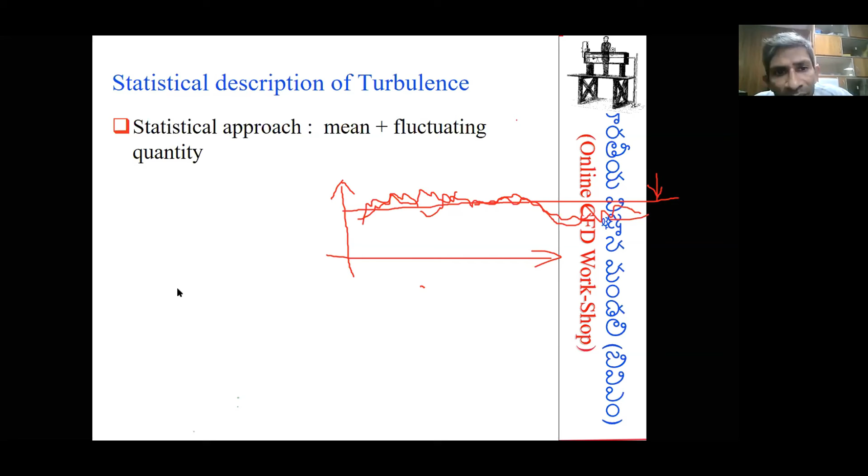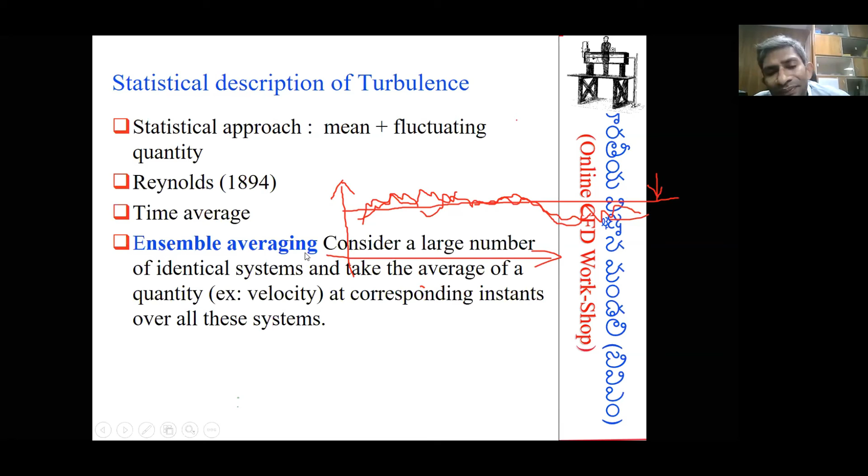So once I do the averaging of the equations, the way to proceed is as follows. This was introduced by Reynolds, and one can think of time averaging, or do the sampling and an ensemble average. What we're talking about is an ensemble average, so that the time component is still preserved.

So you think in terms of the mean and fluctuations, as I just mentioned. If this is the kind of variation of any signal, it could be velocity, pressure, or density. For the time being, think of every variable u, v, w, and p as sliced into two parts: a mean part plus a fluctuating component.

So u is u bar plus u dash. Similarly, V is V bar plus V dash. Similarly, W is W bar plus W dash. This bar is what is shown as this dotted line, okay?

So if I have values, it is like your class average, okay? Somebody may be getting higher than class average, lower than class average, and so on. You look at a sample size of about 100 students and then look at the class average. This is the class average. I'm more interested as a teacher in what is the class average. Maybe I'm also interested in the lower performing students and extremely good performing students and so on.

But in the context of turbulence, I'm more interested in how my average is influenced by this. The beauty is that you are more interested in the statistical average rather than the individual variations. So the individual variations become a little bit unimportant, unlike a class.

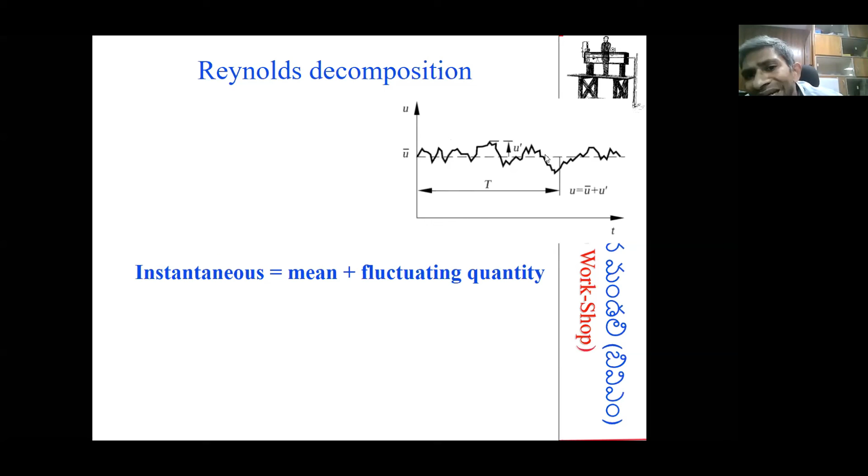Let us say I have another realization. At every value of time, I have, let us say, 10 or 15 values. I average all that and look at every time level. I essentially get a dotted line, and along the dotted line, how to recreate it through simulations is my focus. So here we are talking about sampling.

Statistically sampling and averaging that sample is what we're talking about, and we can use this to preserve the time component in the discussions. So if that is the case, then your fluctuating component's average would become 0, because when you look at the integral...

The integral of U dT will give you U bar itself, and the average of that average also will give you U bar, whole bar will also give you U bar. So the difference between the two is essentially the sum of all the fluctuations.

Look at class average as 50 marks. Somebody gets 40 marks, below 40 marks, above 60 marks. You can look at only fluctuations: plus 10, minus 5, plus 5, and so on. If you sum up all the positives and negatives, you will end up getting U dash whole bar as 0.

So once you have U dash whole bar as 0, one of the serious things that really influences our discussion is that I can now slice every component of my signal, the velocity U, V, W, as U bar, the mean quantities, plus the fluctuating components U dash, V dash, and W dash, and similarly the pressures, temperatures, and densities. I also realize that U dash whole bar is 0, V dash whole bar is 0, W dash whole bar is 0, and P dash whole bar, T dash whole bar are also 0.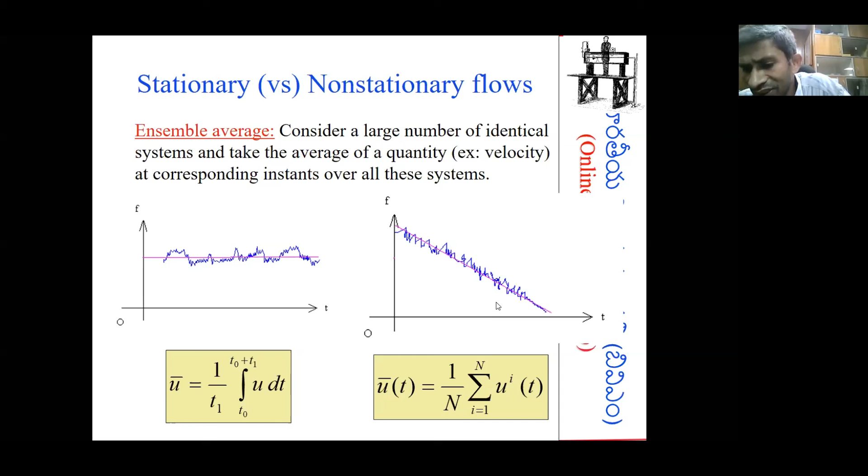So the continuity equation, the mass conservation equation, along with the momentum conservation equations, get transformed into this version, and you can see that the corresponding mass conservation gives you, as if the fluctuating components separately satisfy mass conservation: del u dash by del x plus del v dash by del y plus del w dash by del z is 0. This is obtained from the original equation.

You replace U, V, W with corresponding mean plus fluctuating components, substitute that in place of U, V and W, and do a statistical average. Once you do that, you have del UI bar by del xi equals 0. Then using equations 1 and 2, replace UI with UI plus UI dash, take the difference, and you end up getting del UI dash by del xi equal to 0. So this is about mass conservation.

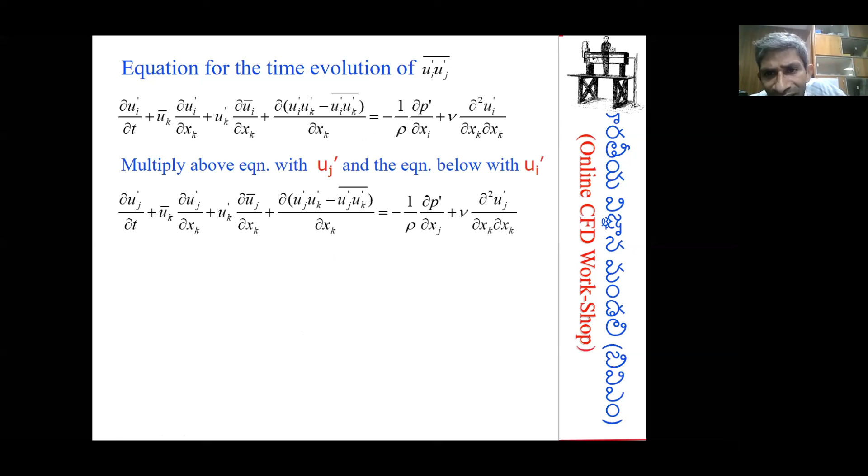Similarly, we can do that for momentum conservation, because that requires a little more serious discussion and a careful workout. I'll leave the workout part, since it must be done in classroom style and we cannot do it here. So if we do all that, this is what you will end up with: the momentum conservation equation written in a certain form here.

Rho times acceleration has two parts: local acceleration and convective acceleration. Then you have the pressure gradient term. Notice that UI bar is the mean velocity, P bar is the mean pressure, and you have tau ij laminar and tau ij turbulent, the turbulent one being what we are slicing out in this whole process. The moment you look at this in the expanded version, you see these terms are exactly the same as the Navier-Stokes equations.

In fact, all these terms are the same as the Navier-Stokes equations, except that you had instantaneous U, V, W quantities. In place of that, you now have U bar, V bar, W bar, which are statistically averaged quantities. Over and above that, from the convective nonlinearity, you have the turbulent stresses, or Reynolds stresses, which have popped up, and these terms require modeling.

Del u dash square bar by del x, plus del by del y of u dash v dash whole bar, and so on. One can quickly write down these 9 components of stress. If you look at them, they are symmetric, so u dash v dash whole bar equals v dash u dash whole bar, giving 6 total actual components which need to be modeled. The moment we say modeled, we are essentially looking at approximations, so that their influence on the mean flow can be obtained, and so on.

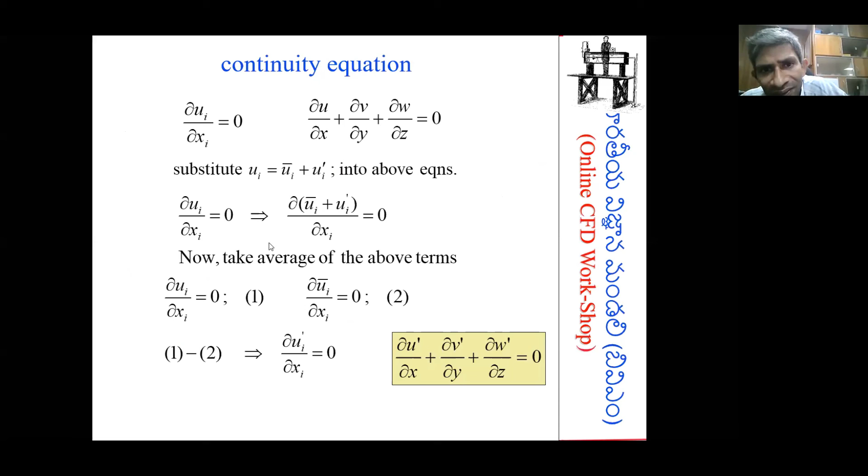For example, f dash g dash whole bar, this kind of thing was popping out to prove that uj bar plus uj dash times del by del xj of ui bar plus ui dash whole bar will give you a term like this. Those terms are essentially popping up as Reynolds stress tensor terms or turbulent stress tensor terms.

These terms are essentially responsible for the need for modeling. The need for modeling essentially arises out of the fact that you have a convective nonlinearity.

When the equations were just Navier-Stokes, you essentially have enough number of equations.

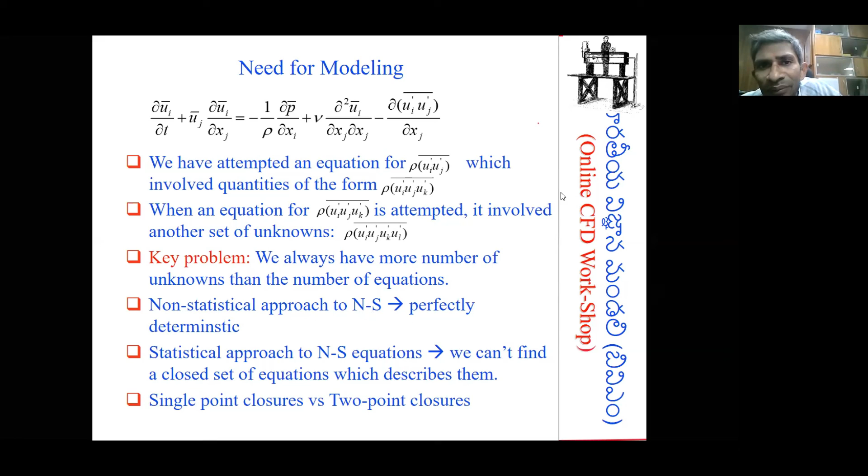You model everything, you don't care. For example, if you think in terms of a simple-minded velocity variation as a function of space, we said, okay, I have this kind of a variation. This variation is actually retained in DNS, whereas RANS simulation doesn't care about all that.

It simply says statistically averaged is what is of interest. So in an engineering sense, a statistically averaged result is what we want. We don't care about every bit of all these variations and how those variations are influencing the mean flow, etc. But there is also something in between RANS and DNS, called large eddy simulation.

You essentially model the small scale eddies—model the eddies which are the dissipative scale eddies and closer to the dissipative scale—and exactly simulate the large scale eddies. Large eddies are simulated; the moment you say simulated, we are referring to getting them exactly. The moment you say modeled, that means we are approximating something.

The moment we model something, that's a shortcut you can take. For example, in an engineering sense, we can say let us try to solve everything using simple-minded correlations. That's an extremely crude model. Correlations are essentially crude models—you conduct experiments, generate a crude model, and you are happy with it. You have nothing to complain.

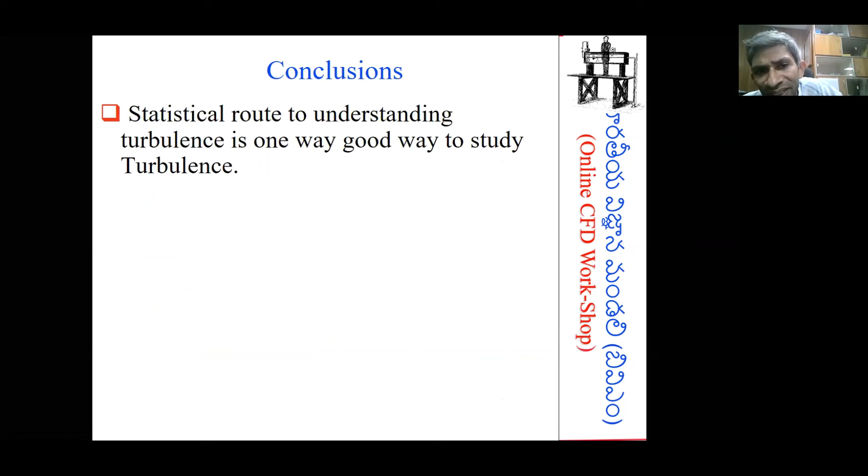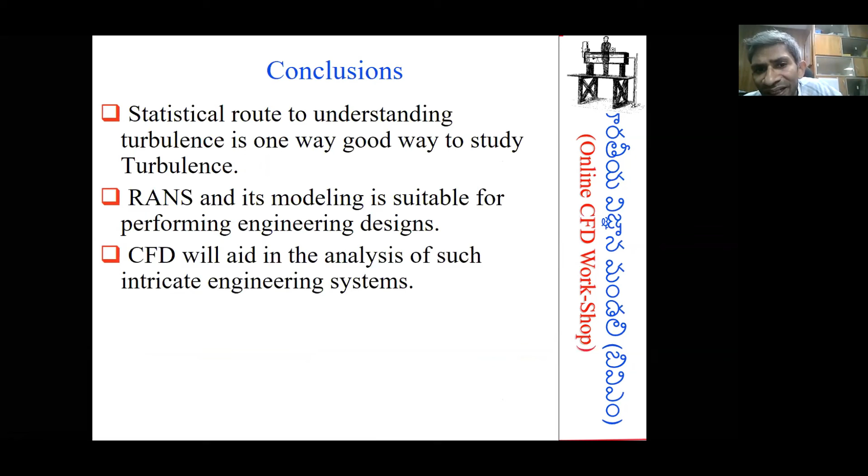So the conclusions are fairly simple. A statistical route to understanding turbulence is one good way to study turbulent flows. RANS and its modeling is suitable for performing engineering designs, and CFD will aid the analysis of such intricate engineering systems. DNS is good but extremely expensive, precisely because it simulates all the scales present in the system, whereas RANS does modeling of the entire range of scales. It doesn't care about integral scales, it doesn't care about Kolmogorov scales. I'll stop here and take up questions.

Please feel free and go ahead. Good afternoon, sir. Yeah, go ahead, please.

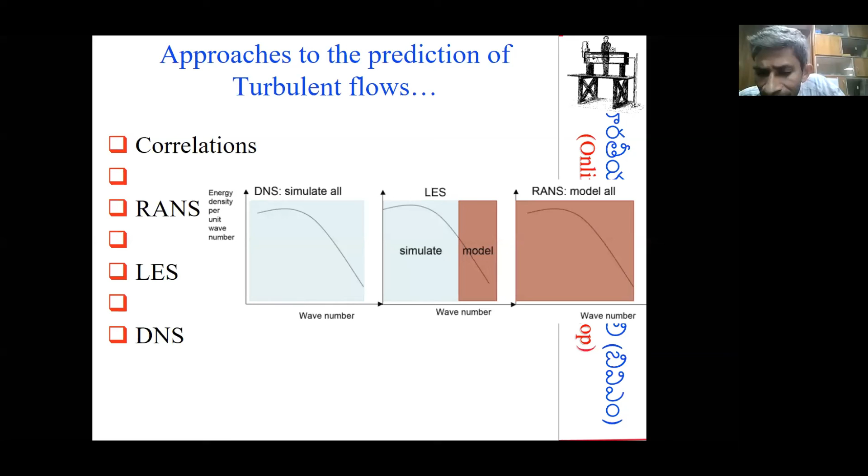Sir, when you do the simulation of CFD, the inlet velocity is within the limits of laminar flow. Let's say you take 1000 inlet Reynolds number. You can also have a measured turbulent velocity profile. I was operating the system with a Reynolds number of 1000. Based upon the fluid properties and the duct diameter, I calculated the velocity, and I gave the velocity at the inlet, assuming the flow is laminar. But when you take the contours or vectors at certain locations within the domain, it seems to be turbulent in nature. Then how can we say it is laminar, even though the inlet condition is laminar, but at certain locations it seems turbulent?

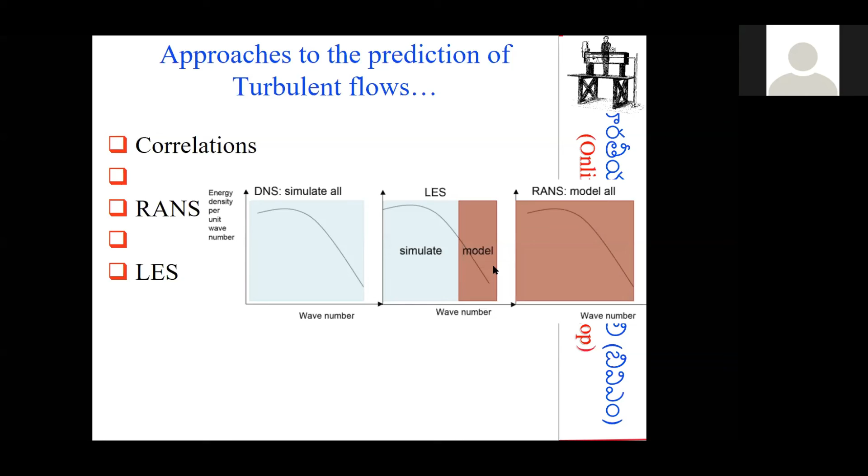Coming back to your specific question in the context of CFD, you are giving some inlet velocity profile which is laminar. Have you looked at whether the flow is laminar for that Reynolds number or not? If it is a pure duct flow, what kind of velocity vector contours and what location are you talking about? I'm not familiar with exactly what you are referring to in your context.